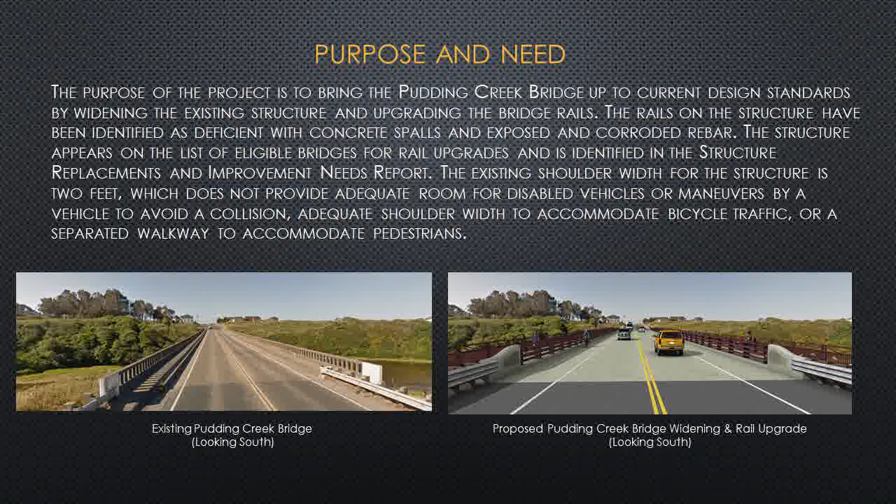The image on the lower left-hand side of the slideshow shows the existing Pudding Creek Bridge looking south. The image on the lower right-hand side of the slide is a simulation of the completed Pudding Creek Bridge widening and rail upgrade. The image on the left depicts the typical section for the existing bridge, having a 28-foot wide roadway with 12-foot lanes and 2-foot shoulders. The existing raised sidewalk is 5 feet in width. The image on the right depicts the proposed typical section, proposing 12-foot lanes, 8-foot shoulders, and two 6-foot wide separated pedestrian walkways.

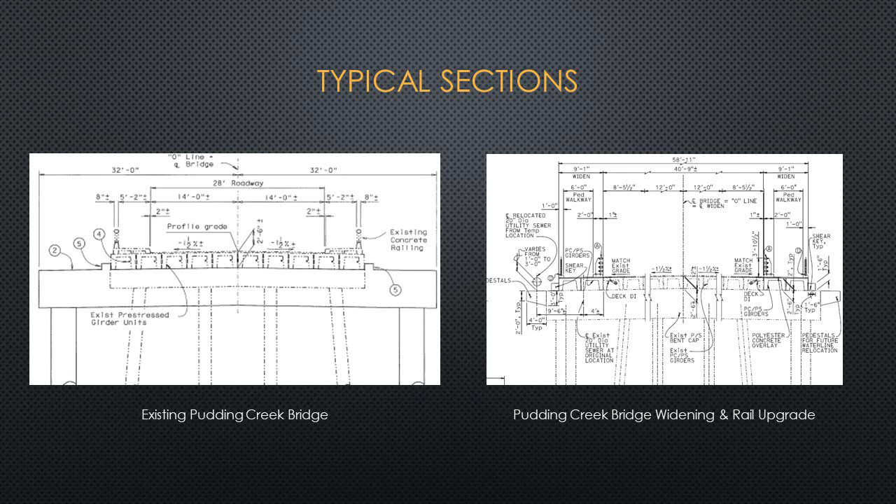Project description. The California Department of Transportation proposes to widen the bridge and upgrade the bridge railing of the Pudding Creek Bridge located on State Route 1 at post mile 62.12 in Mendocino County. The proposed project would widen the bridge to accommodate two 12-foot wide lanes, two 8-foot wide shoulders, two 6-foot wide separated pedestrian walkways on each side of the widened structure, and upgrade bridge rails to current standards.

The project also proposes complete streets improvements by constructing the sidewalks on both sides of SR1 from Pudding Creek Bridge south to Elm Street and north to Pudding Creek Drive to comply with the City of Fort Bragg's general land use policy, requiring that any major development along a major arterial within the limits of their jurisdiction construct sidewalks on both sides of the development to the closest major intersection.

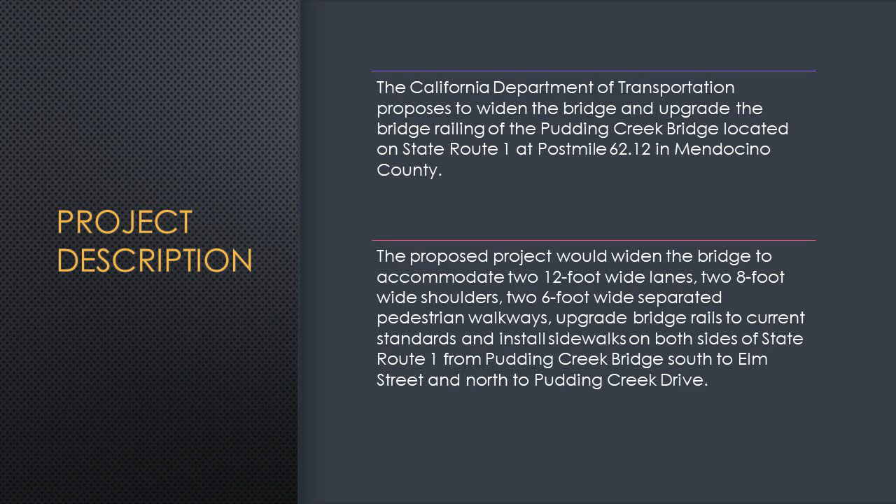Bridge widening and rail upgrade. Construction summary. A temporary access road and a temporary work pad would be constructed in each quadrant of the bridge adjacent to the abutments. The existing bridge sidewalk and concrete barrier would be removed and 32 pre-stressed girders, 16 on each side of the structure, would be placed on the widened abutments and existing piers.

No pile driving or in-water work would be required to replace the pre-stressed girders. A 6-foot wide separated pedestrian walkway with pedestrian railing would be constructed on each side of the bridge. ST-75 barrier rail would be installed between each travelway and pedestrian walkway, and a new pedestrian railing installed along the edge of the widened bridge deck.

The existing drainage scuppers on the bridge would be eliminated. Runoff would be directed off the bridge to bioswales for treatment. New bridge lighting would be installed on the pedestrian rail. Existing joint seals would be replaced and extended. A polyester concrete overlay would be placed on the bridge deck. Rock slope protection would be placed on the bench in front of both abutments to discourage illegal camping.

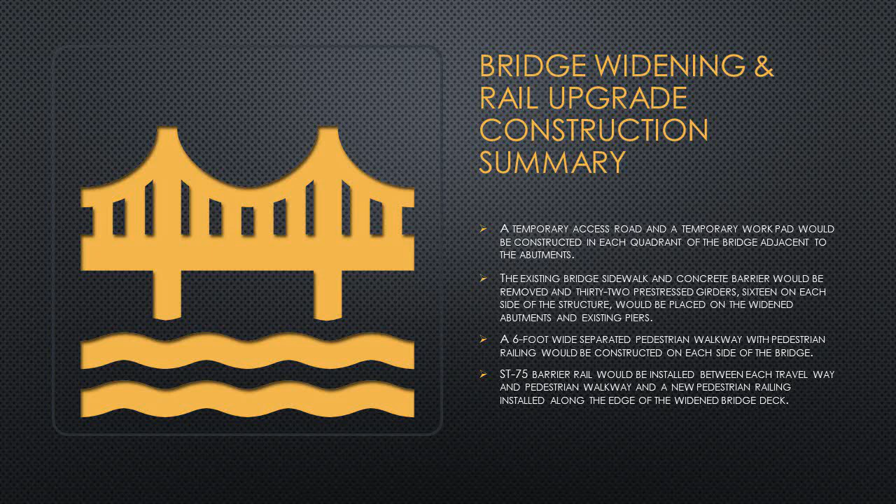Roadway and sidewalk improvements, Elm Street to Pudding Creek Drive. Clearing and grubbing of vegetation would be necessary for construction and access. Typical construction equipment types for this work are excavators, dozers, and mulchers. All construction spoils and debris would be removed and disposed of at a permitted disposal site. All soil areas disturbed by construction activities would receive permanent erosion control treatments sufficient to address the erosion potential of that soil area and slope.

The roadway at the north and south approaches of the bridge would be widened to transition from the roadway to the widened structure. The roadway shoulders within the project limits would be widened to approximately 8 feet. The widened shoulders would require new sub-base, base, hot mix asphalt, and a geosynthetic pavement interlayer. Approximately 3 feet of existing shoulder would be excavated to allow for the new pavement section.

New 6-foot wide sidewalks would be constructed on both sides of the roadway leading up to the bridge. Sidewalks and shoulders would conform to the widened bridge and would extend from Elm Street to Pudding Creek Drive on both sides of the roadway to ensure complete connectivity. Existing metal beam guardrail on the bridge approaches would be upgraded. New striping pavement delineation and signage would be installed.

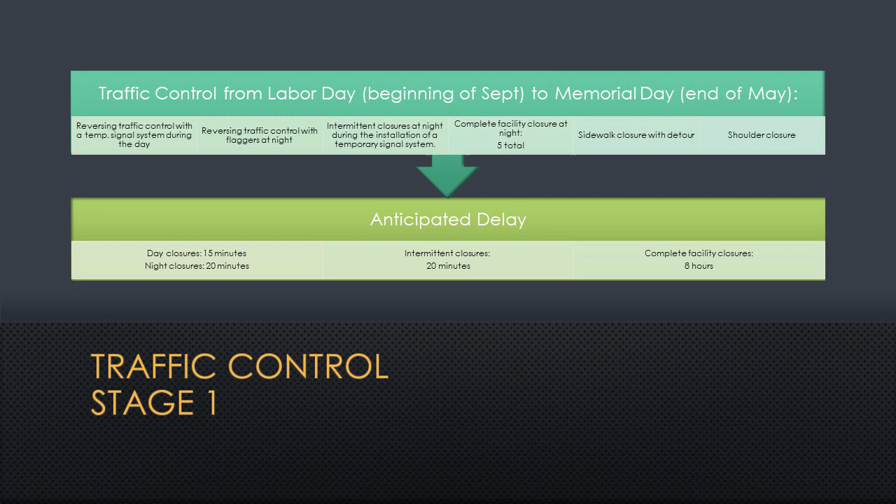On this slide is information about the first stage of traffic control taking place from Labor Day to Memorial Day. Work will take place during the day and at night, with intermittent closures at night during the installation of a temporary signal system. The first stage of traffic control will feature 5 nights of full closures of the facility. Emergency vehicles will have access during full closures as needed. This slide features information about the second stage of traffic control taking place from Memorial Day to Labor Day. Work will take place at night, and this stage will also feature 5 full night closures of the facility.

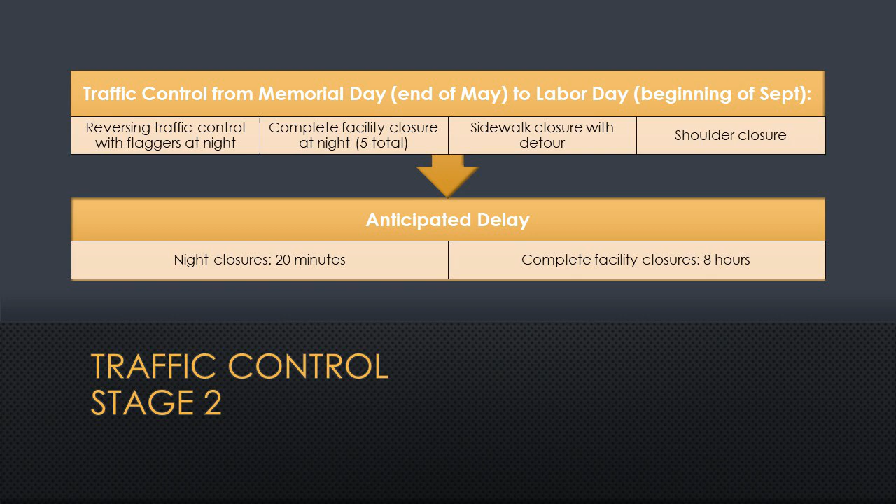Right-of-way and utilities. Most construction activities would occur within state right-of-way. Temporary construction easements would be required from 6 parcels and 1 fee parcel. Potential utility conflicts would be identified at the final design stage. Potholing would be requested at the appropriate stages to verify whether conflicts exist, and relocation scenarios would be determined during the final design stage.

The City of Fort Bragg owns a 12-inch high-density polyethylene force sewer main located on the west side of the bridge that will be moved approximately 9.5 feet west to accommodate the proposed bridge widening. The City of Fort Bragg's water line that presently crosses Pudding Creek at the Pudding Creek Dam would be relocated to SR1. Sleeve pipe hangers or slides and support hardware will be installed on the east side of the Pudding Creek Bridge to accommodate the relocation of the water line.

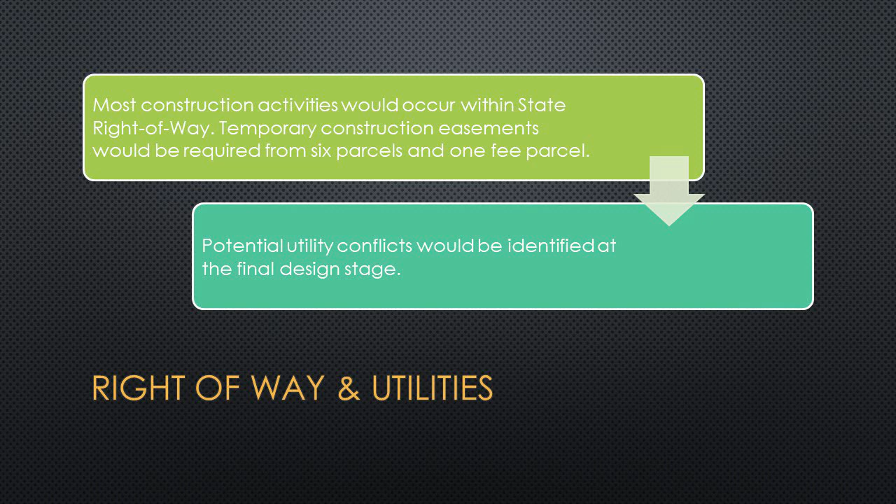Environmental document, initial study and proposed negative declaration. This document may be downloaded from the Caltrans North Region Environmental website or from the CEQAnet website. The proposed negative declaration provides notice to interested agencies and the public that it is Caltrans' intent to adopt a negative declaration for this project. This does not mean that Caltrans' decision regarding the project is final. This negative declaration is subject to change based on comments received by interested agencies and the public.

Caltrans has prepared an initial study for this project and, pending public review, expects to determine from this study that the proposed project would not have a significant impact on the environment for the following reasons. The project would have no effect with regard to agriculture and forest resources, air quality, cultural and paleontological resources, energy, geology and soils, hazards and hazardous materials, hydrology and water quality, land use and planning, mineral resources, population and housing, public services, recreation, transportation and traffic, tribal cultural resources, utility and service systems, and wildfire.

The project would have less than significant impacts with regards to aesthetics, biological resources, greenhouse gas emissions, and noise. Permits and approvals needed: North Coast Regional Water Quality Control Board, Report of Waste Discharge. The permit application will be submitted after final environmental document approval.

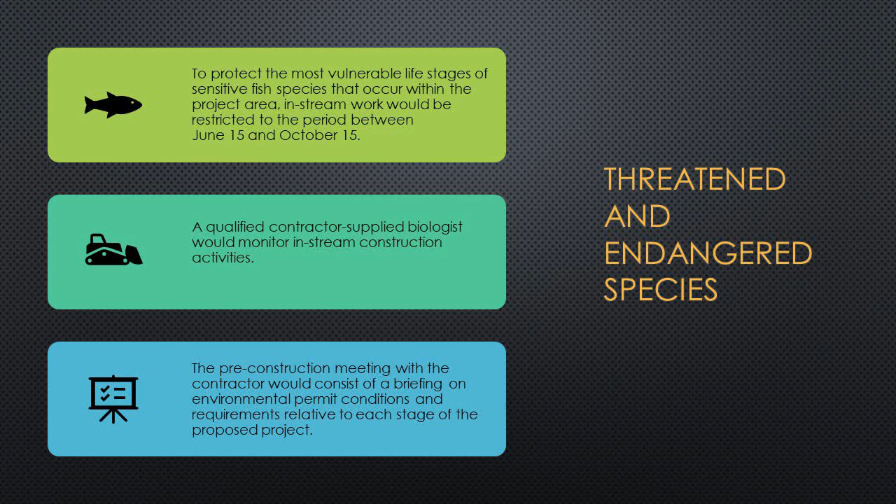Threatened and endangered species. Artificial night lighting may be required. The use of artificial lighting would be temporary and of short duration, and lighting would be directed away from the channel and focused specifically on the portion of the bridge actively under construction to reduce potential disturbance to sensitive species. To reduce the effects of artificial light on sensitive biological resources, use near water courses would be limited to critical need due to accelerated work schedule to meet permit deadlines or reaching a critical juncture in work at a time when it would be infeasible to stop construction.

Hydroacoustic monitoring would be conducted during any construction activities that could potentially produce impulsive sound waves. Hoe ramming or jackhammering associated with bridge demolition may be included. Hydroacoustic monitoring must comply with the terms and conditions of Federal Endangered Species Act and California Endangered Species Act consultations. A hydroacoustic monitoring plan would be prepared prior to construction that addresses the frequency of monitoring, positions that hydrophones would be deployed, and techniques for gathering and analyzing acoustic data, quality control measures, and reporting activities.